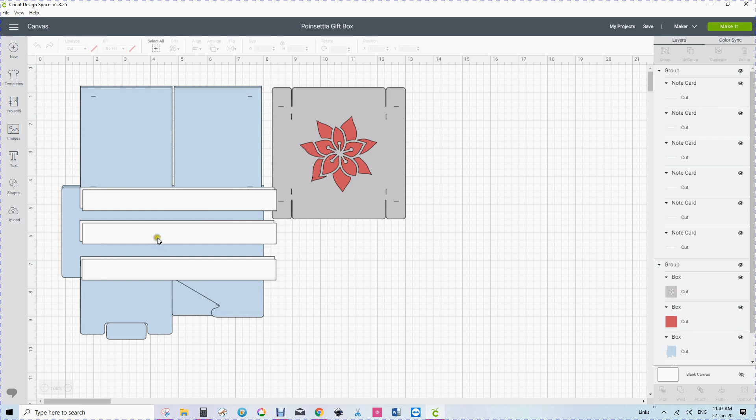However, if you do put them under the lid, you have a little bit poking out, and then you also have a bit more room in between them.

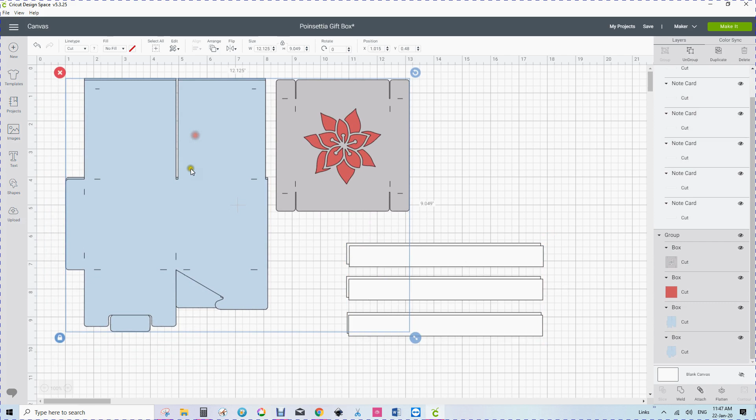Now I'm going to move these across because these are the bands that go around the middle, and I'm also going to change those a little bit this time. What we've got here is we've got a lid that's around here, and we've got the two pieces that go at the side. Now that's obviously grouped, so I'm going to ungroup that now.

Now I'm going to show you these little cut marks here are the original way of showing you where to score on your project, and that was before we had scoring tools. We've developed a lot since then.

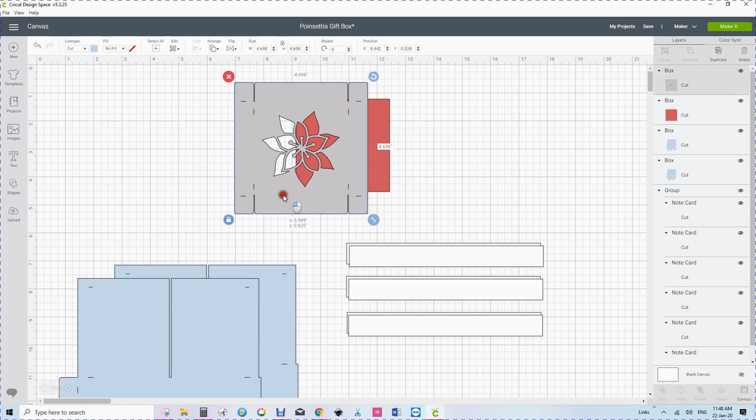Now this is the lid, and I'm going to show you that on the lid we can change the scoring little dits here to the nice scoring lines we have in Design Space. One of the most wonderful score lines we can have - it is an absolute favourite of mine in Design Space - is that we can have straight score lines. We don't have to have cut score lines.

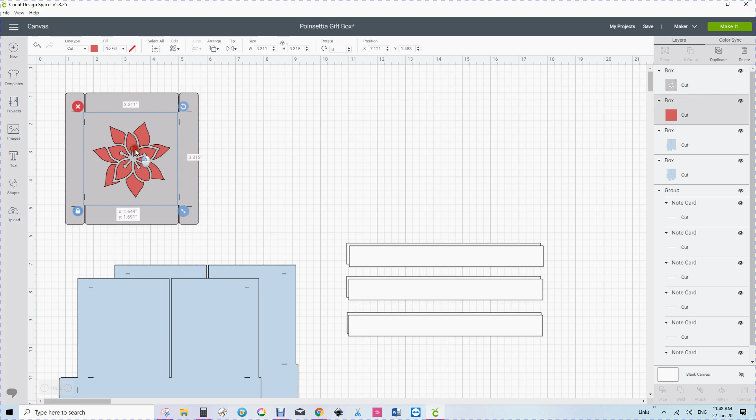Now, in order to do that, what I have done is initially this goes inside the lid under here. So I figured that, if that goes inside the lid, it should be right in the centre. So I've taken - my measurements are in metric, no, they're in imperial, sorry - this is 3.311 inches. Now that goes in the centre of this, and this is 4.698 inches. So what I have done is I have subtracted this from the 4.698, and hopefully I've still got that measurement there.

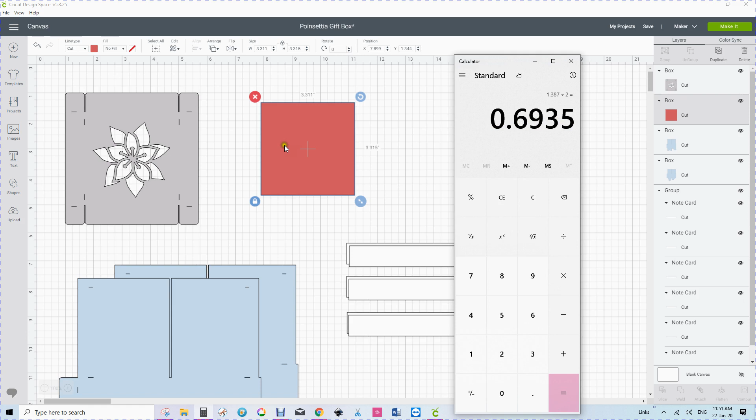So I'm going to get my calculator and put it over the side so that I can see it properly, and I'm going to take this measurement, 4.698, and I'm going to subtract this measurement, which is 3.311. I now have 1.387, and that means that I've got to allow half for the top and half for the bottom, so I'm going to divide that by 2, and I get 0.6935, so I'll probably go 0.694, and I'll try and put in 6935 and see what I get.

Now, first thing I'm going to do is, with this lid, I'm going to line it up on the 1 inch mark, and to do that I'm going to go to the position, and I'm going to position the top left corner at 1 and 1. You can see one of them has already got to 1, so that's fine.

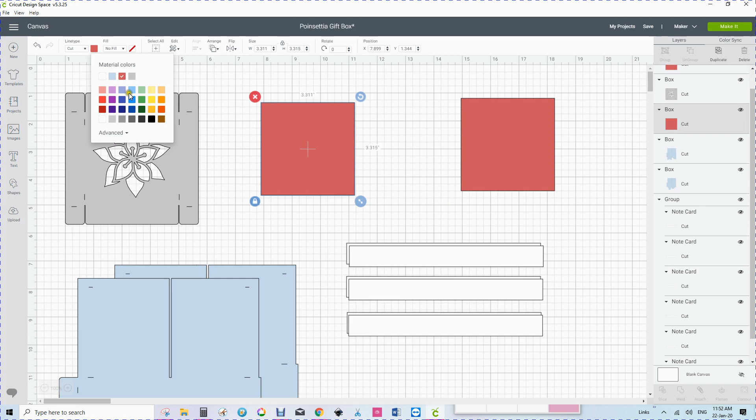Now what I'm going to do is I'm going to duplicate this box, and this box I'm going to change to another colour simply because I'm going to be playing with it and I don't want it to be mixed up with the one that's going inside. Now I've got this lined up now, and I want to take out these cut marks, which I will do, and that will be the last thing I do with the cut marks.

And I want to position this in the right place. So I'm going to come over here, and I could just simply position it like that and think, yep, that looks pretty right to me.

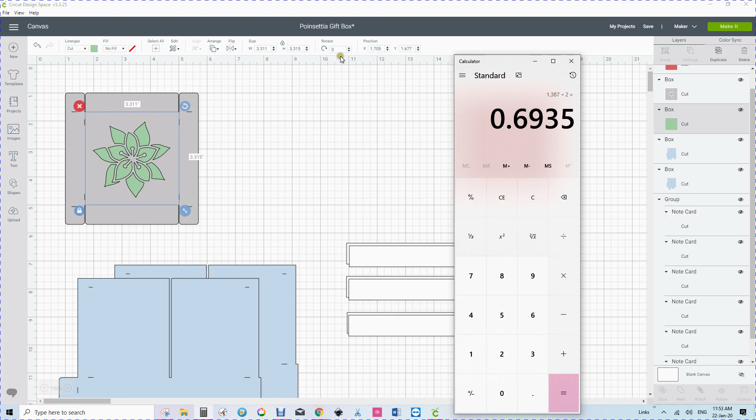However, if I look at the position of it, according to my calculator that should now be 1.6935. And if we look at this, it's not 1.6935 - our y-axis, neither of them are right. So we're going to come in and set it to 1.6935, and I'm going to come down to 1.6935. Now it defaults to 1.694, so that's fine. I've now got that in the right place vertically. Now I should have it in the right place horizontally too, since I've taken it in from this side as well. So that's where I want that, but I can't do any more with that at the moment except bring it to the front.

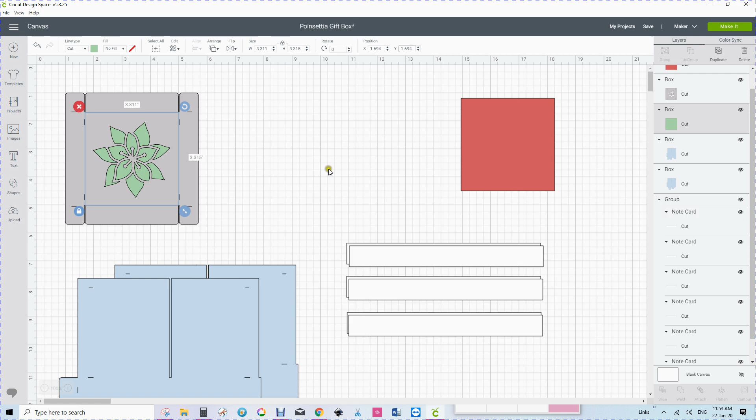So I can have a look and make sure I'm working with the right one - bring it to the front. Now you can bring to the front in two ways. I've worked out that most things in Design Space have two ways of doing them, and the right click menu gives you a drop down menu, and you can see that's brought to the front, so that's no problem.

Now what I'm going to do is add the score lines for this little piece here. We now know the size of those little score lines, so I'm going to go to shapes and get a score line, and that will put my score line up on the board. I'll click over here, and bring my score line over here.

Now because my score lines aren't vertical, they're horizontal, I can do that in a number of ways. I can hold my finger on shift and drag it around to where it's 90 degrees, or I can come up to rotate and just put in 90. Now I want 4 little score lines that are going to go across here, and these score lines only need to be just as long as the pieces here.

Now how am I going to get them in the right place? Well, first thing I'm going to do is change that 3.311 to 0. Hang on a minute, the memory's going, so we're going to do that - 0.6935. So the width of that is 0.6935.

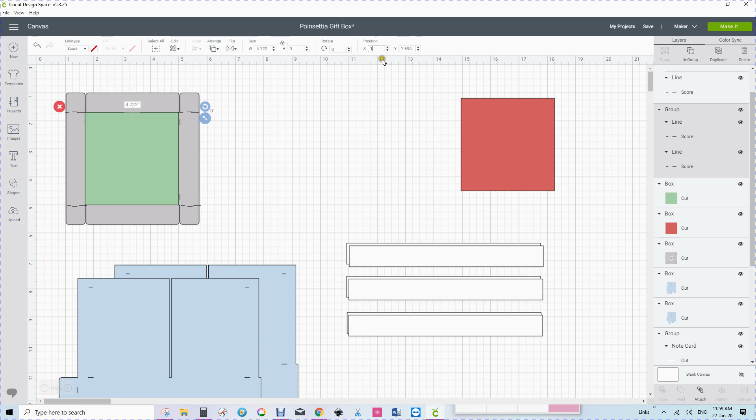Let's look at the bottom one. 1.694, I'm going to hit that. Now that didn't work out right.

We aligned it with the green box and not the white one. So what we're going to do now is take it back to where we want to align it to, and that's 1. Don't forget you can make mistakes in this, you just go back and fix them up. Now I'm doing this, I've done it before, but it doesn't mean I won't make a mistake again.

So here we go. Now this is some more calculations, because now we want to calculate it from the top mark, and we know our complete box is 4.698, so I'll bring this one in from the side if I can. No, I can't seem to do that. So, 4.698, I'm going to go 4.698.

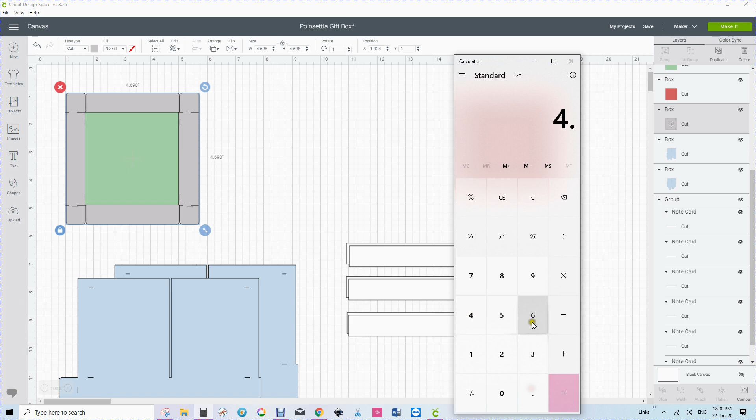Now from that I'm going to subtract the amount that is the side piece, which we decided was... I've lost all my calculations now.

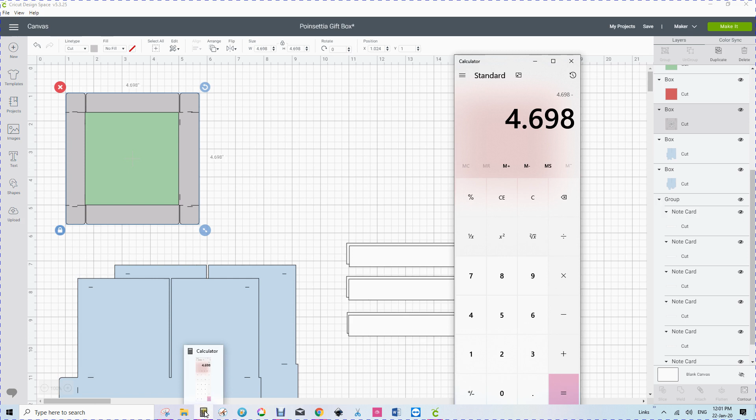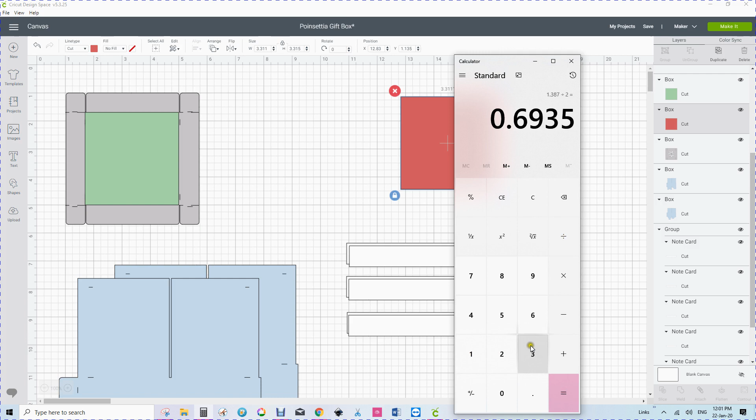Calculator: 4.698, minus 3.311. Right, now we're going to divide that in 2 to get half of it, and then we're going to add 3.311, and that makes 4.004.

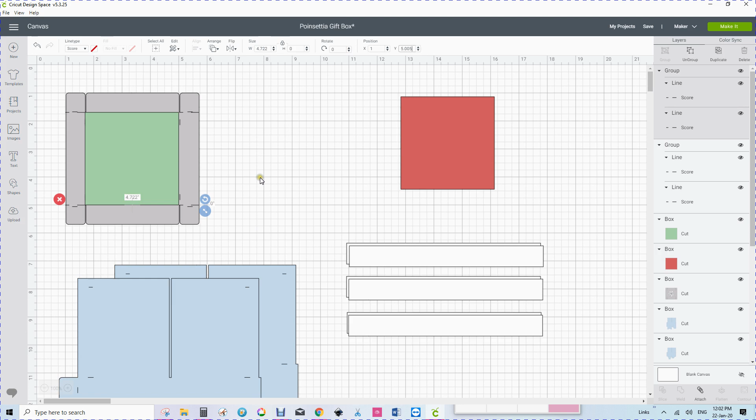4.005 actually. So now this line down here, we are now going to make 5.005, and that one should now line up with the bottom, and I think we're probably pretty right there. Looked pretty right, but now we are right.

Now, having done all that, we now have to remove this box. The green box I'm now going to change to a score line. And now that I've changed that to a score line, you can see that they are all pretty well lined up.

So I'm now going to attach all those score lines. And I'm going to take the top lid of the box, take it to contour, and contour out—oops, we better leave that one in, that's a flower. I'm going to contour out all the little cut lines at the bottom. If you contour out something you're not supposed to, you can always put it back in again.

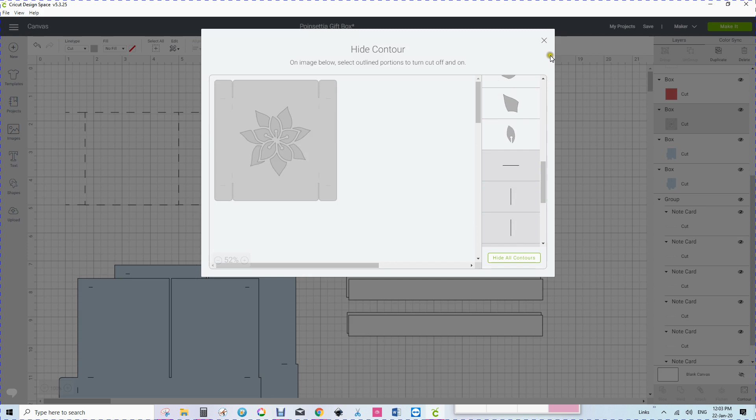So now I've contoured out all the cut lines. Right, that's it, I've got all the cut lines contoured out. This little red box still goes in behind there where it's supposed to.

And this one now, all I have to do is line that up with a position of 1 and 1. And now highlight the top of the box and the scoring lines and go attach, and I now have Design Space scoring lines in the top of my box.

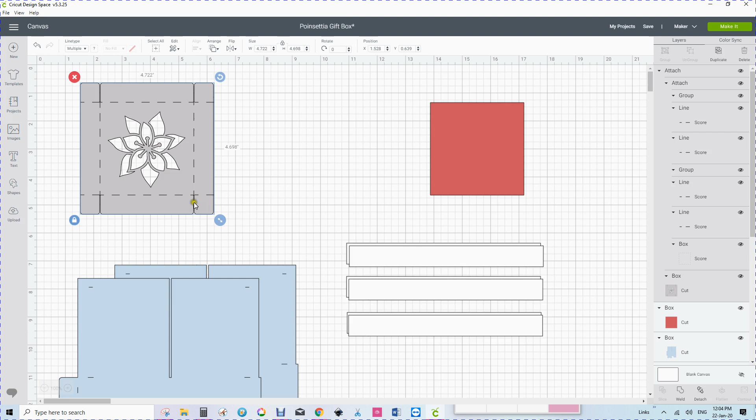Right, now there's another thing we need to do. You don't have to do this, but it does make it a little bit neater when you're putting it together. As you tuck the tabs under, sometimes this little tab here shows a little.

Now it shouldn't if we've got our measurements exactly right, but in order for that to be just a little bit more perfect, I'm going to take a diamond and add that. I'm going to make that diamond just a little diamond, and come down here—needs to be a bit bigger diamond than that. I don't want it too curved.

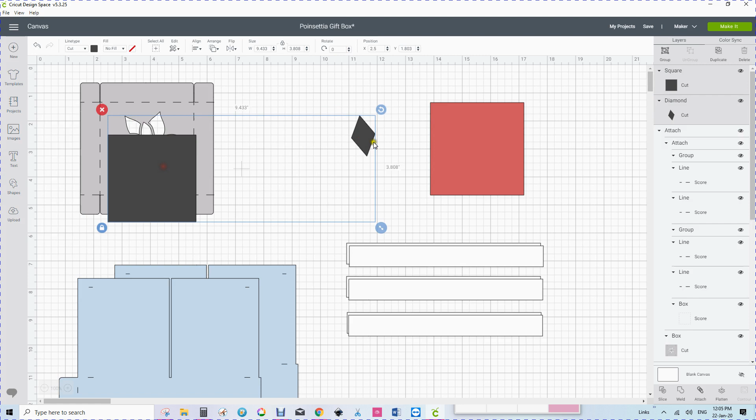What I'm going to do is snip off the bottom piece of this. Now, I could use a square. Let's have a look at a square. No, let's get rid of the diamond. I'm going to use a square.

I don't want a huge square, and I want to rotate this square probably about 10 degrees. So let's have a look. 10 degrees is fine. Now I'm going to line this square up to the very corner there.

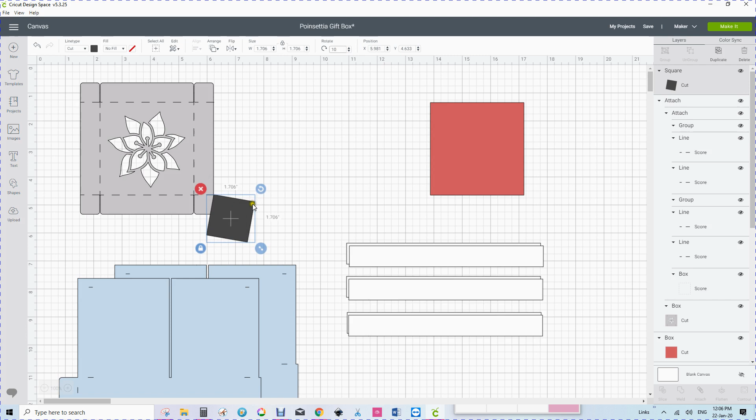And bring it in here. Now I want to make sure that that's absolutely right. So to do that, I'm going to have a look and see whether these look as if they're about right. If you're not sure, bring it up in size. We can always enlarge it so that we've got that just spot on.

Now, if I do it that side, because I've rotated it 10 degrees, I can do that. Now, because I have this attached, I need to detach it in order for this to slice out, and I'm going to move it forward.

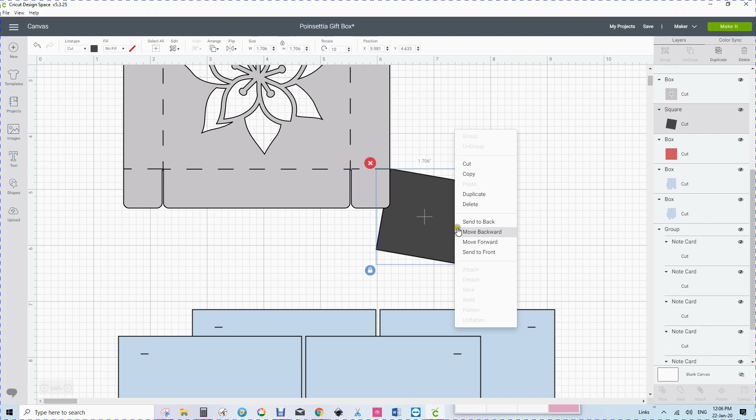This time I've used the drop down menu. Now if I click on that and this, I can use slice and take this bit away, take this bit away, and this bit away, and you can see I've still got a little tiny bit there, but I can take those away.

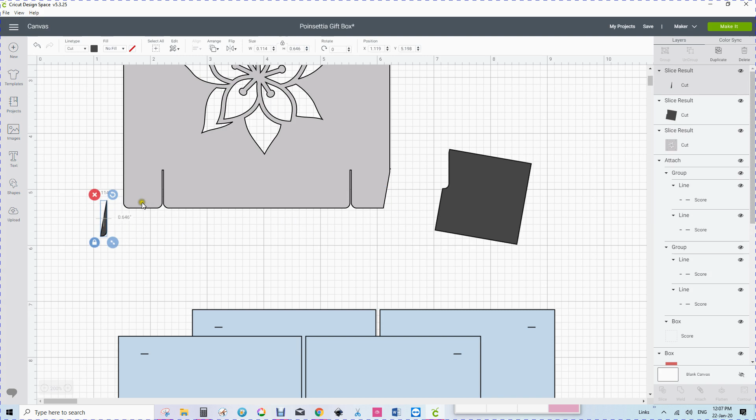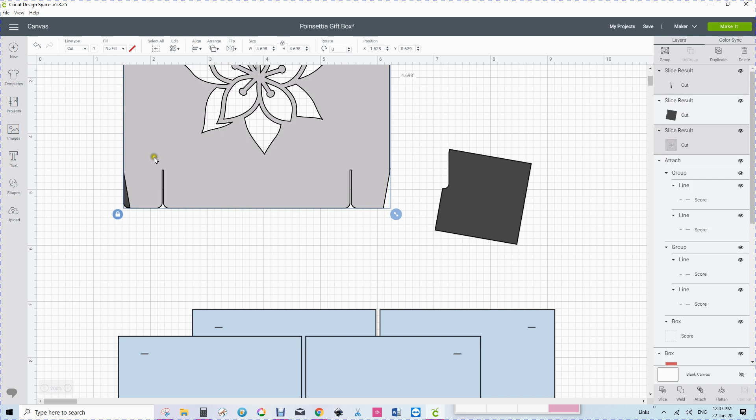Now I can, using that bit, go flip horizontally, and that will be able to line up with this piece on this side. And if we line these two pieces up, and if I go and click that one and I click this one and I just go align to the bottom and then align to the left, I know that those two pieces are going to be aligned, and I can now go slice, and hopefully that slices that off as well. And yes, that's sliced that off.

So now there's an interesting thing that you can do if you're going to slice something and you want to slice them out and you want to do it at the same time. What we're going to do now is we're going to flip this one back again, and let's flip that horizontally. Now we're going to have to flip it vertically so that we can see whether it's in the right place, and we're going to have to flip it horizontally again. So as I said, you can, well, that's not going to behave itself, is it? Aha, it's on the wrong side.

So let's put that one up there, bring this one over here, let's just rotate that one and it'll be in the right place. Now we have to hope that that was rotated right, because what we need to do is have that straight up and down, don't we? 186, 360, 186. That should be 180, I think. So let's make that 180 and see whether that's right. And that looks better. Now I'm going to align this to the top and the right.

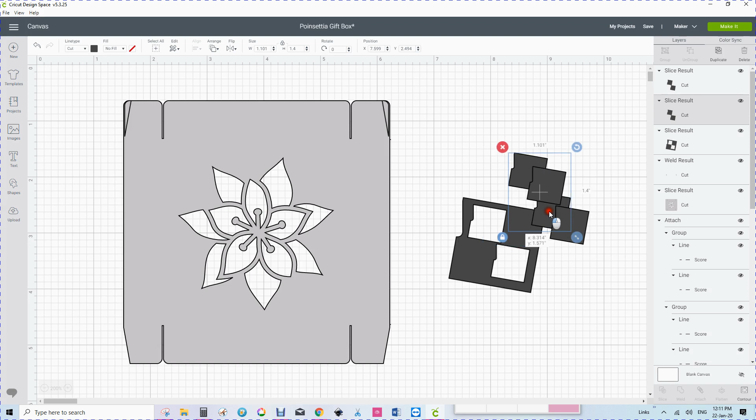Now what I'm going to do is I'm going to say this one here and this one here are one layer. We're going to make that one layer because we're going to weld them together. Now if you looked up here, you will see those two pieces now are welded together. They're not actually together, but they are welded together, and that makes them one object. So therefore, when we now highlight this, because they are one object, they will slice out of the bottom object. Now that's an exciting thing. I discovered that. It was probably already discovered well before I discovered it, but I have used that a lot.

So now again I'm going to highlight these little pieces here, make sure on the right hand side I've got the right ones, highlight the lid, and I'm now going to slice both those two pieces out together, and hopefully that's come out of there, and again that's come out of there, and I've now got a nice little trim bottom that's, well, at least my top has got a nice little trim bottom that's coming in here.

Now I notice that I've got two little pieces there, so I'm going to take this back to contour and look at my piece to see whether I've got a little bit extra that I haven't allowed for, and I need to check on there.

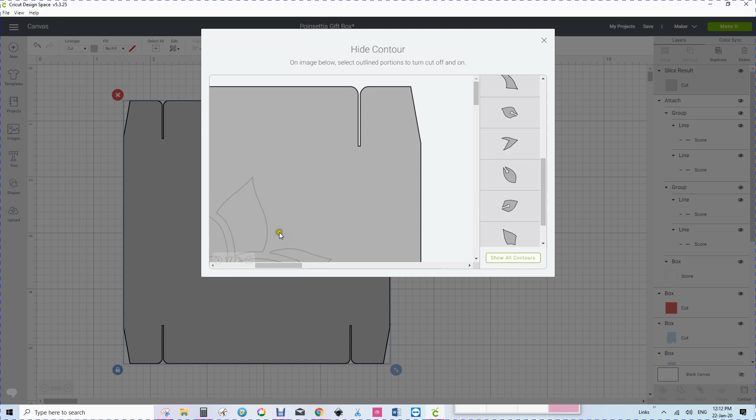So if I go hide all, and I want to be able to see this, so I'm going to take it down in size and then move it over, so let's do that this way, and I'll take it down in size again. And when I select that I notice that these little pieces are not in here, so I'll put in show all contours again so we can see it all, and that's what it was, it's sitting underneath there.

So right, I'm going to go undo because that was in the right place. I'm now going to click the lid of the box, and I'll do the right click menu, and I think I moved that again, so I shall undo that again, and undo it again because I notice that they're poking out the side. So I'm going to, what? I've got no pieces in there. Oh dear. Let's redo.

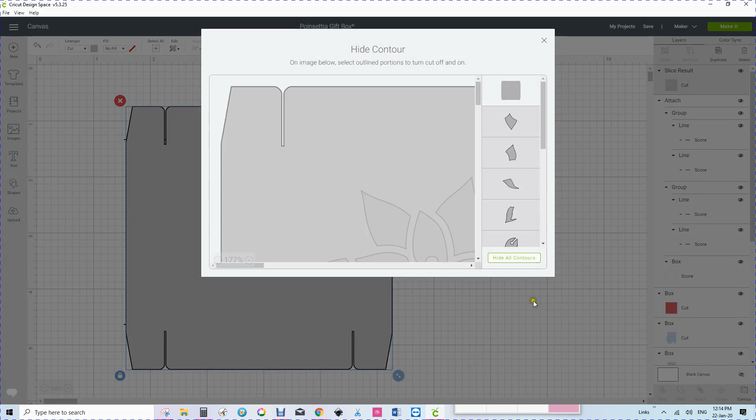Let's go contour, and that says hide all contours. Oh, we've got show all contours, right. Okay, now we're right, we've got show all contours. Now we've got these little bits, and I'm now not sure whether I'm going to be right, so I'm going to right click on that, go send to back, and now I'm going to have to line this up again with the side piece.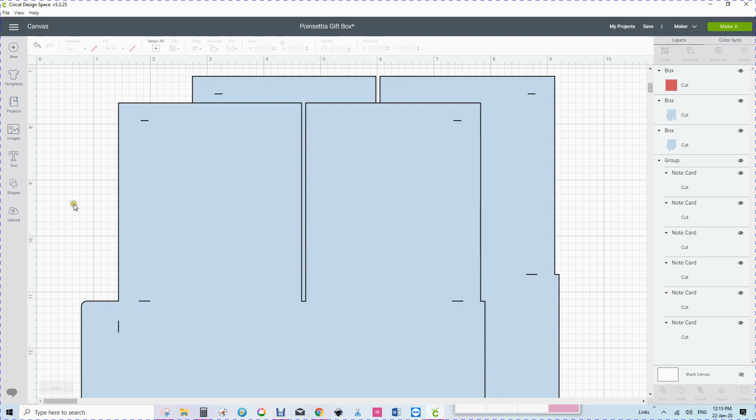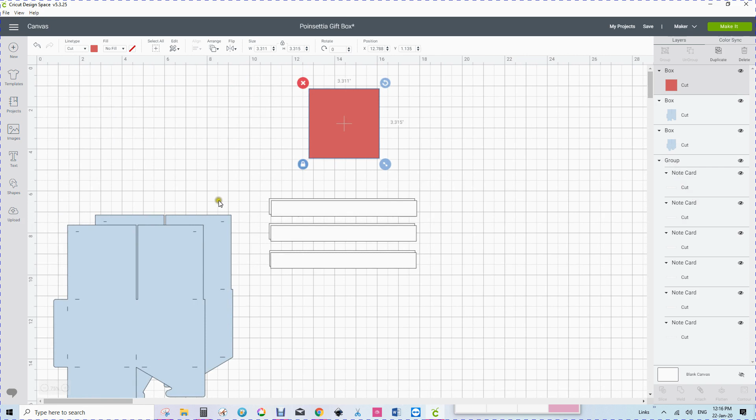Oops. Now I've lost him again. Where have you gone to? Oh, he's hidden behind there. Okay, let's look for him. Oh, here's that one. Right. Now, note cards. Oops, I think we've actually lost him. Here he is, right there.

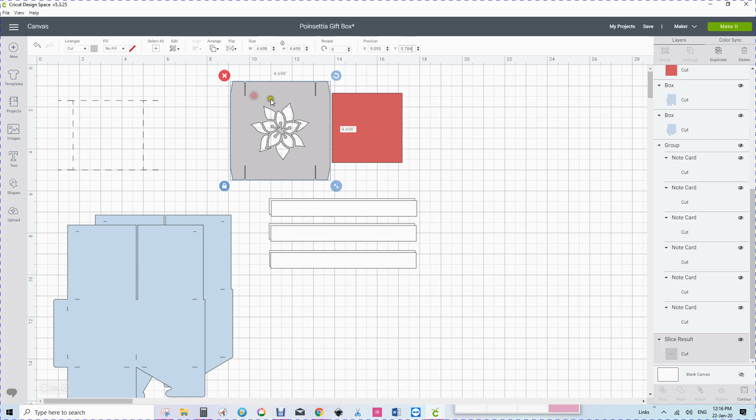Now, this needs to go at 1 and 1. Nope, that goes 1.695. So that goes down to the x value of 1, and this goes down to 1.695, and it slightly goes down, and this goes to 1 and 1.

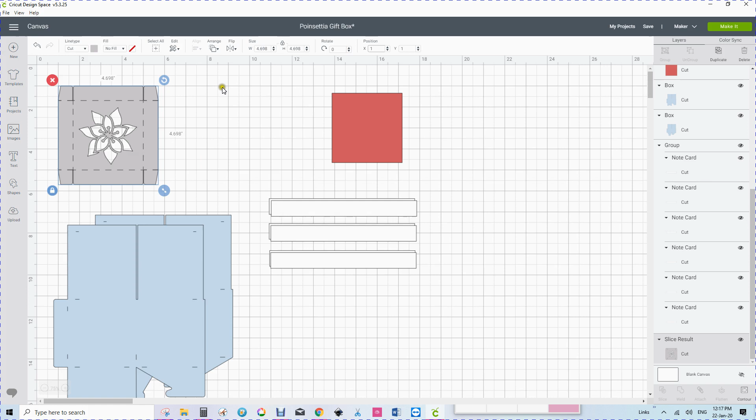Now, people say that using the position is quite difficult, but if you remember, X is hugs, and that means you put your arms around someone, so it goes straight across, and a Y has got a tail on it, and that means that it goes down. So your Y-axis is going down the page, and your X-axis is going across the page. Now I've got this all lined up, I'm going to highlight both of them, and I'm going to attach.

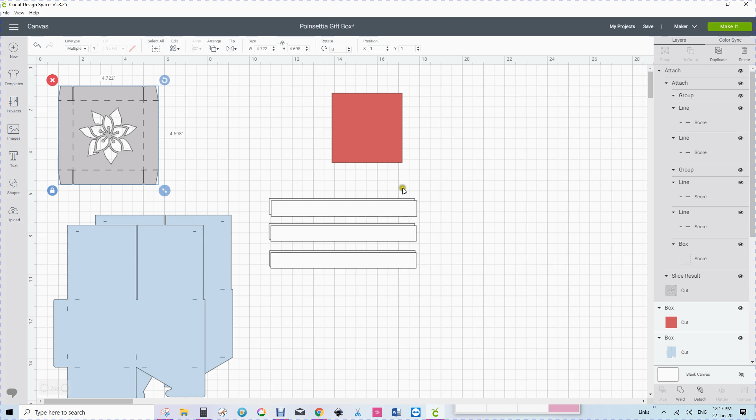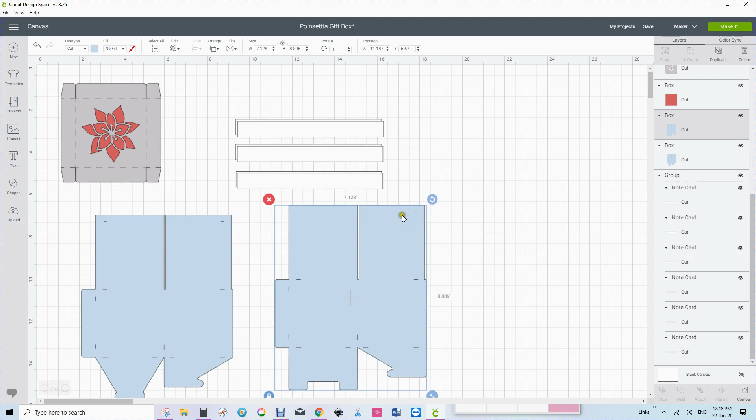Now, that seems like a long-winded way about going about things. However, it does get the lid into a nice lid to go on top of it, and the little red piece goes in behind the lid, and that, because we've chosen the same size, should fold down over the top and the sides and make a nice neat little area. Now, doing these ones, again, you don't know how far these top ones are down, so let's put this one over here so that we can work on the left hand. Oh, for some reason I like working on the left hand top of the screen.

Now, if you've got a big enough box, you'll see this box is 7.128 inches wide, and we've got a little tab on the side of that. Now, if you wanted a smaller box, you could make that 12, but if we're going to keep with this, we have to cut it in 2 pieces. So that makes us a little bit bigger box. We could also make it a little bit bigger, because you could make this one or other side.

You'd have to choose the long side and make that 11 inches, and that would make it a slightly bigger box than what we've got. But at the moment we're just going to do these. Now, this and this look to be the same, so we only need to do one. We'll go to our shapes and we'll get our score line.

Now we're going to put our score line in here, and this one we do just need to line up, and this is eyeballed. If we do this, it's amazing how wrong we can get it. Now you can see that I appear to have it in the centre there.

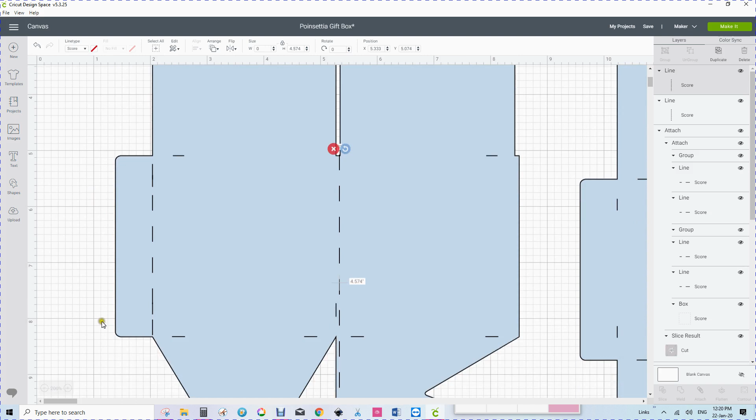So that score line needs to come down in that very centre, and if we have to, then it's much better to again go up in size. Let's make it all over the right, and I've got it now at 200. Now when we go to 200, you can see that that makes a big difference. We can actually line it up much better. We can take it right to the centre of there, and that lines it up.

Admittedly, it's still on this piece here, so when that goes down, it actually comes down and it's down below there. I would have preferred it if this had been exactly where I had wanted it and gone to the top of there. And the other thing with this is that it's not a straight line, and if we put it in a straight line with that point there, we're on the side of this. So maybe that's what it's supposed to do.

When you are putting this across, there is a little piece here. So we've got to make sure all those pieces line up. So hang on, we'll put that in the centre of that, and it doesn't line up quite here, but that's probably where we're going to put it.

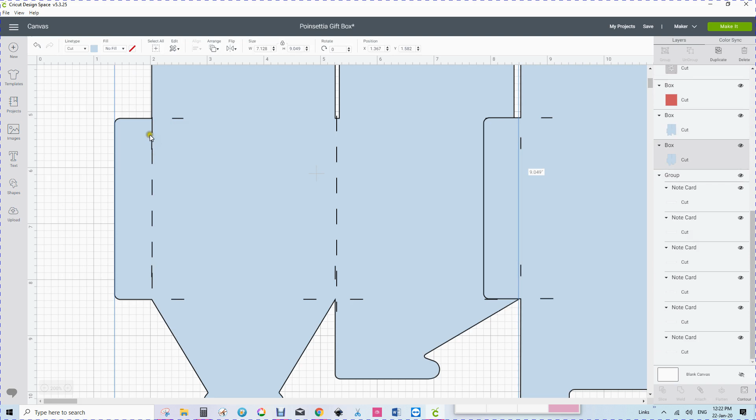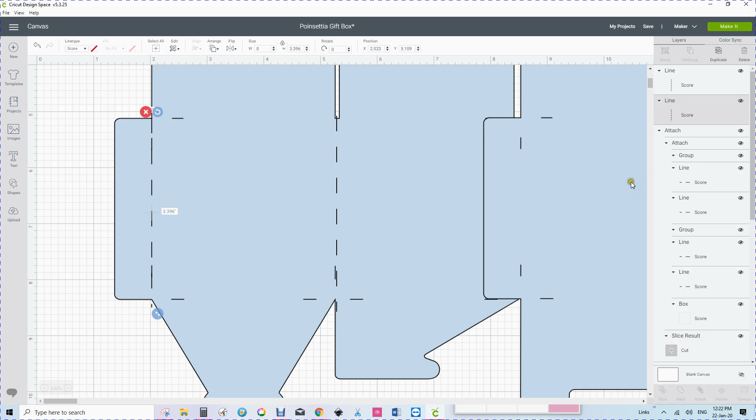If we make this bigger, make the scoring line slightly longer, we'll just get rid of that, and we bring it up to the top and down to the bottom, you can see that when we do the scoring line, we line it up top and we line it up bottom, we've got it there. Now if it goes over, it doesn't matter too much unless you're in the wrong place, and then we're going to get another scoring line.

I'll take this one and I'm going to duplicate it, mainly because it's vertical. Now this scoring line is going to go not there but on here, so that cuts to there and that piece goes to the scoring line that is going to go here. So we're going to line that up there. So with that coming to here, we now know that this scoring line probably needs to be exactly where they said it should be, and that's lined up to the left of this.

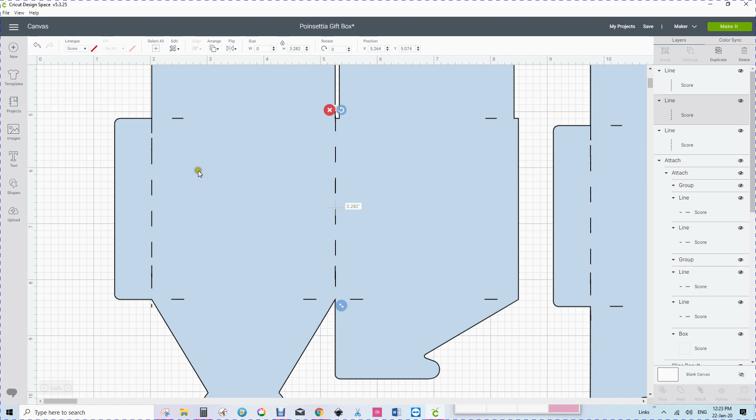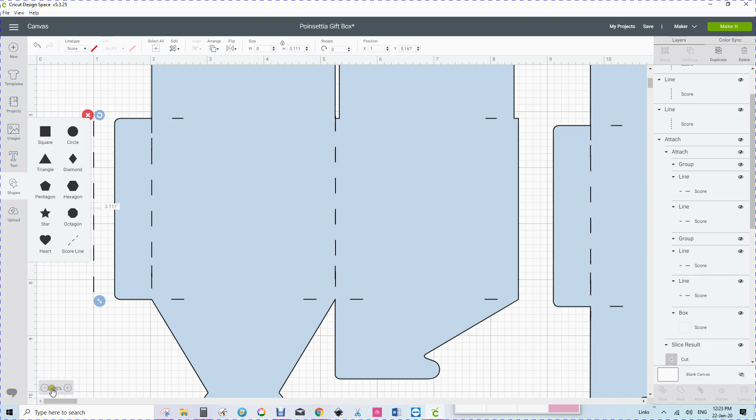And when we line it up to the left, we can now see that that scoring line comes directly up from the bottom. So those are little things that you need to be aware of when doing your scoring lines and making sure that they're in the right place. Now just because that's jumped up doesn't mean to say it won't score to the bottom. Now we need another scoring line, or we need another 2 scoring lines. Well, we need 3 actually, don't we? So we're going to take this down a bit so that we can see our project a bit easier.

And if we come up here, here's our scoring line. And again, if I put my finger on shift, I can rotate it sideways and it rotates nicely. It's easier to pull it out from the left, oh no it's not, it's easier to pull it out from the right, otherwise we're going to turn it off, aren't we? Right, there we go. Now this says 6.278, that would be approximately right because we've got a little tab in here. Now this little one here I'm going to use because I know that that's there.

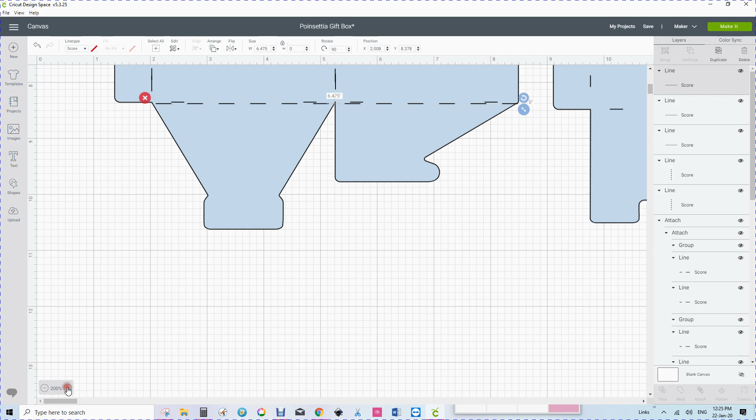This one is also going to need to come across here and line up there, and if we duplicate that we can put it down here. Now we again have to make sure that these score lines are in exactly the right place. So again I'm going to take it up to 200 because I won't be able to see it.

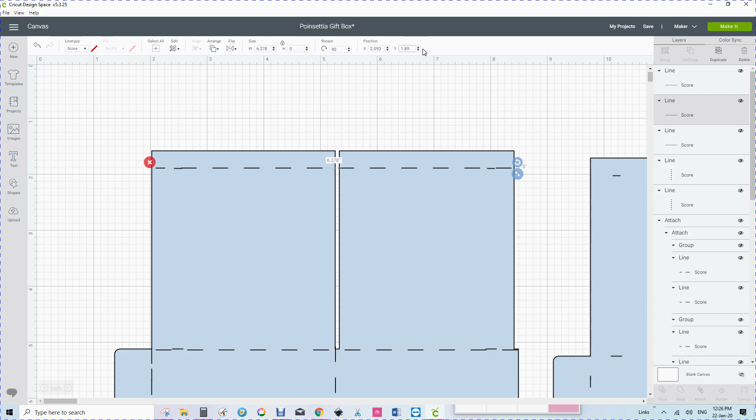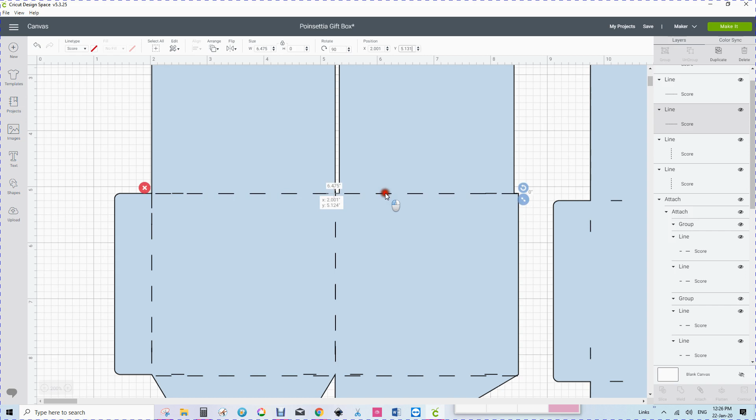Now this one I'm going to look at, and again the line is just a fraction out. I'm going to move it up and see if I can get that spot on. And when I let it go it seems to drop a little bit. There we go. I think that we're probably pretty right with that one. And with the bottom one, I'm going to line it up with this line again, and oh, it jumped up. There we go. And I've now lined it up the bottom.

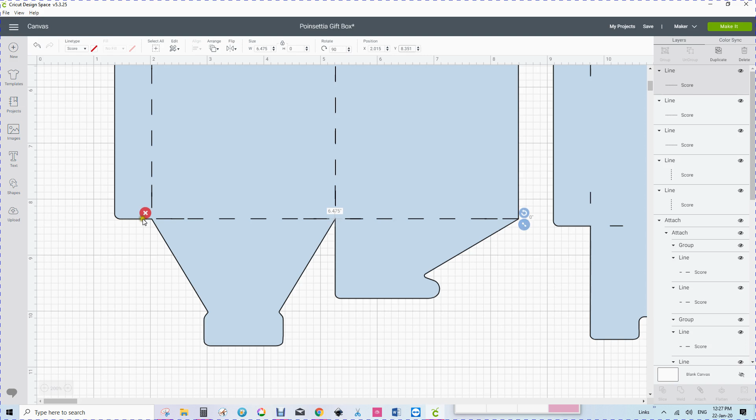It might seem to be a little bit picky what I've been doing, except that when you've got a score line and it folds so beautifully like the score lines on Design Space, you really need those score lines spot on. If those score lines aren't exact, then your scores will be in the wrong place, and it will make it much more difficult to get your finished item really professional looking.

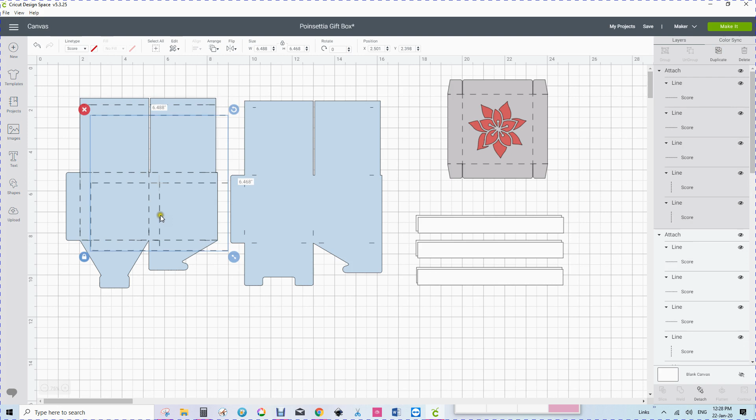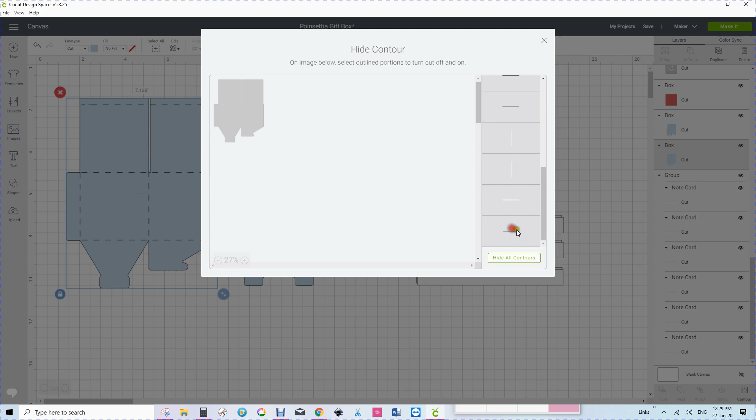Right, now, although I've got the score lines in there, what I haven't done is taken out the pieces that are cut. So again, I'm going to go to contour, and I'm going to contour out the cut lines. Those two, and then when I put it back, all I've got is the outside lines there on this one. Then we'll take this one, and I can just see this line behind there. So again, I'm going to go contour on this one, and again I'm going to take out the cut lines.

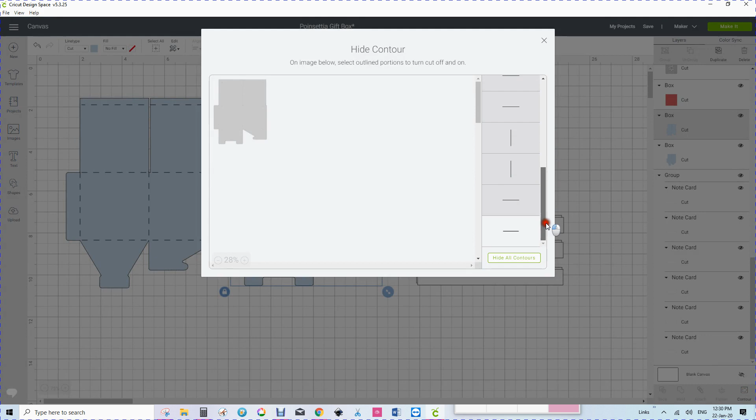Now, in previous versions, we were never able to take out the cut lines, so it's wonderful that we can hide the contour like that and make those go in the right place and take out our cut lines. But you don't really want to do the wrong thing and do all that. Now, when I'm highlighting, I can just pick the two that I'm highlighting and go attach. I don't have to go across the whole thing. I can, as you see, just highlight, make sure the two of them are there, and that will do that. Now that's put these in there.

Now these I'm going to ungroup, and they're individual, and these will actually go to the top and bottom, and then they have one that goes through the center. Now you can do this and make this quite pretty like that. This one will show just a fraction, because you can see it just comes a fraction down under the lid. You can place these wherever you'd like, or one of the things that you can do is, and we'll duplicate this so that we don't muck up our pieces.

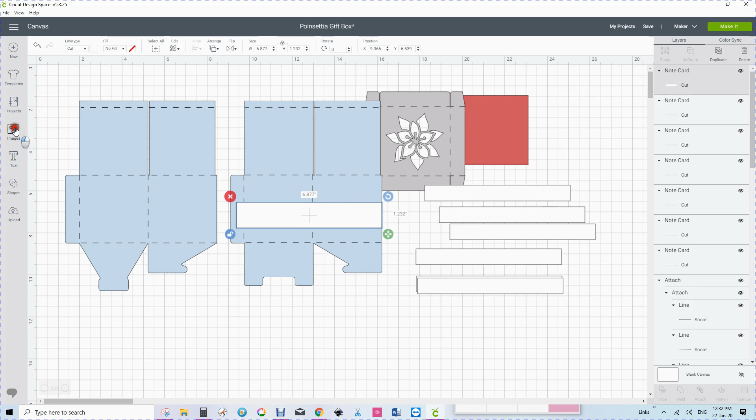And I'm going to go into my images, and I'm going to see whether there is another image. Actually, I want a poinsettia image. Poinsettia, and I'm going to have a look and see if there's a poinsettia one that I like. Oh dear, it didn't find any images for poinsettia. Okay, let's go back, because I know where there's a poinsettia image, right here.

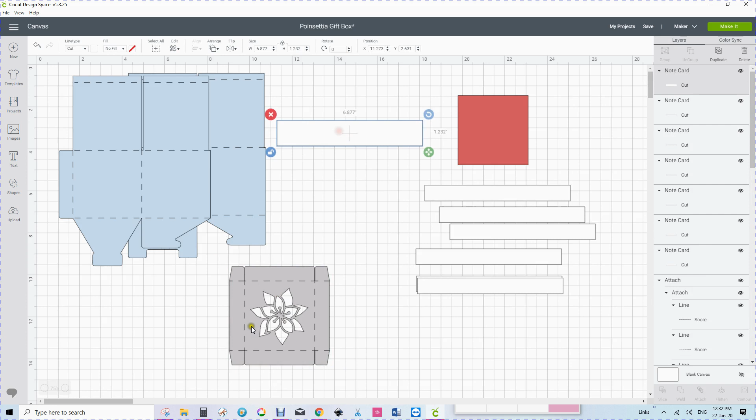Now, that's interesting, because I have that image there, and I want to put that image in this little thing here. And it's going to be difficult because I've already done that, so I'm going to duplicate it. If you're going to play around with something, duplicate it. Then you know you've got your original. Right. Of course, I'm going to have to now detach the score lines, but I don't need those score lines, so I'm going to get rid of those.

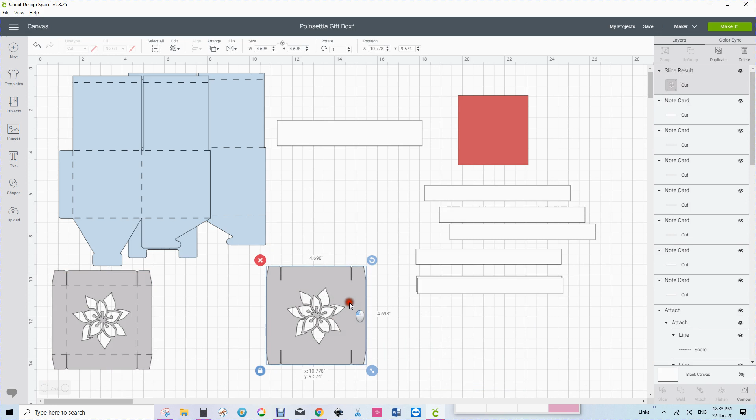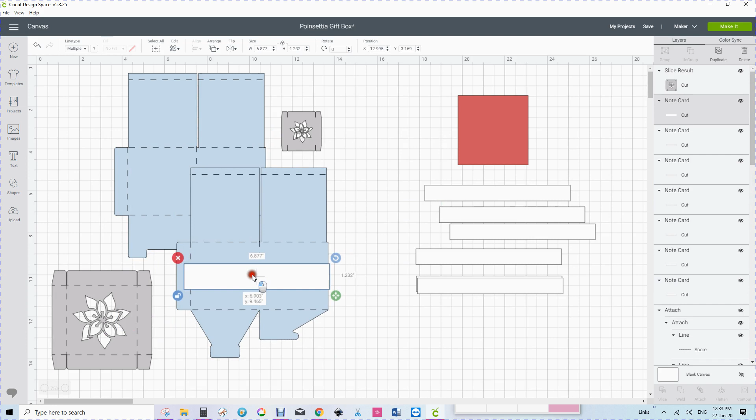I want this little image here, and I want it smaller. So I'm going to make it smaller, and I'm going to see if I can cut that image out of the background. Now, first of all, we need one of these. So come down here, and I'm probably going to go about here, so that I've got it on either side, and I want this to slice out of there. Now, yep, it's all white behind, so it might need to be a little bit smaller.

Aha. Okay. I want that to go in here, in the centre, and I want another one of those to go in there, in the centre. So I need to highlight that one, and highlight that one there, and I'm going to highlight that one. I'm just going to group them for a minute and bring this up here, and then go back and highlight.

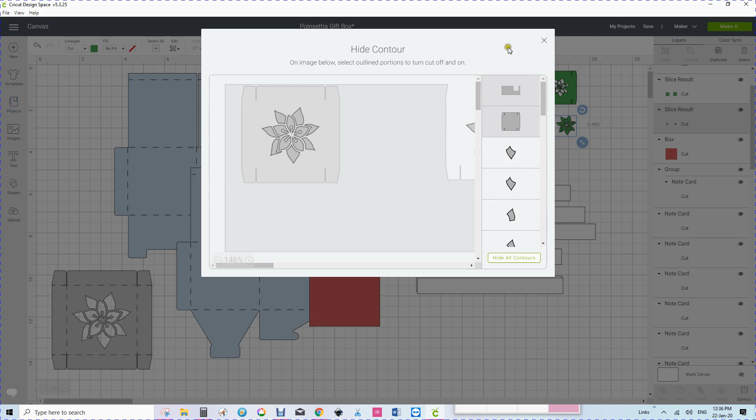If I choose that and go slice, I should have sliced out images. These ones. Now I'm going to contour away that one and that one. You can't move that there, and that's a slightly bigger one. Now I've taken those out of there.

Now, I'm not sure about this. Let's come down here, and I need that. So if I put that there. What I'll do is I will align center vertically and align center horizontally. And now I'm going to slice. Remember, I've welded those two little things together, so they will be there.

Now we need to put it over something to see what we do. Now, what we have now is when we put this over the box, we're going to have a pretty little poinsettia in the middle. Those are very fine lines, so at the moment I'm not certain that they will cut, but if you go into images and then, instead of going poinsettias, go borders, I'm pretty sure you'll find that there's lots of pretty little borders.

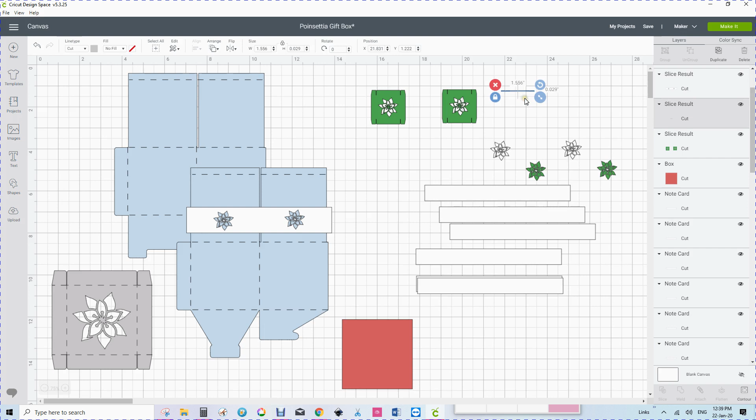And I've done this one. I'm going to now try and play with it and see whether it works as well as what I'm hoping it will. I'm not quite sure why I've got this little piece here. I'll probably find I sliced it out to find I need it, but then I've often done that. Now I'll keep those little things, and of course, as I tell everybody, you've got to save your project. If you don't save, you will probably find that you've done a lot of work and then you've got nothing for it.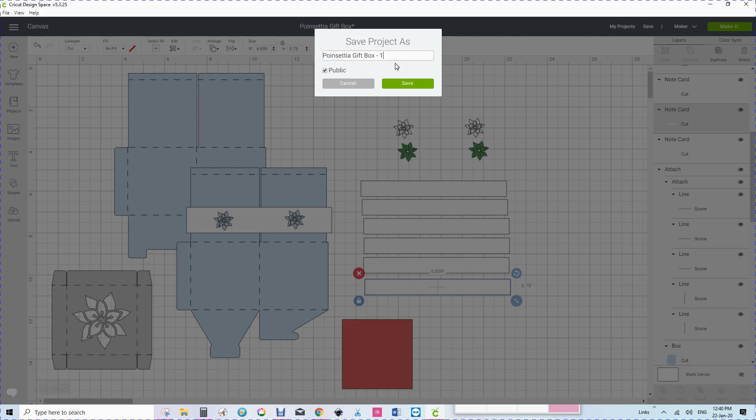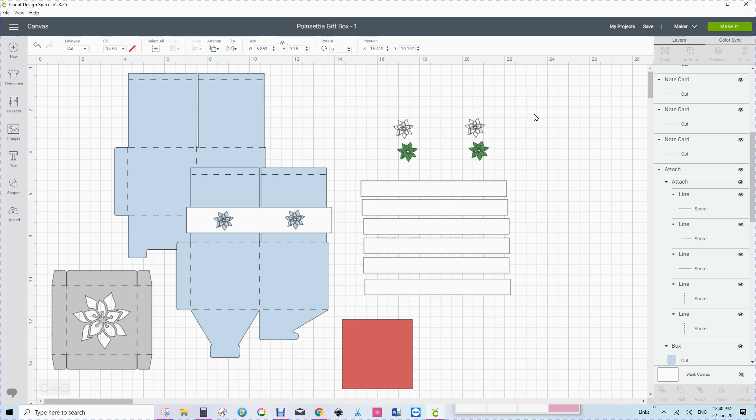And I always remember a little story where God gave Jesus and Satan a project, and he gave them a computer each, and he said, I want you to show me how much you can do in 24 hours. So they went and did everything they could possibly do on a computer. They worked furiously, and then at 30 seconds to go, the power went off, and Satan jumped up and down. Finally the power came on with just 5 seconds to go, and Satan jumped up and down and said, I've lost all my work, I've lost all my work. And Jesus comes in and says, I haven't. Jesus saves.

So there we are. As you see, I made this a little bit bigger to do those cuts. I'm not sure whether those cuts would work, but they definitely work on vinyl, so that's another option you have other than paper to put those in. And hopefully this will give you some idea of what that does when you put it together.